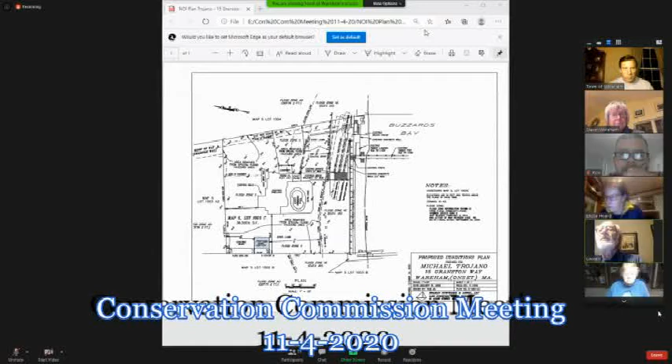Okay, so this project site is at 15 Granston Way in Onset. The project involves the construction of an addition to a barn in the buffer zone to a coastal bank. A 16 by 20 foot barn addition is proposed, approximately 71 feet from the top of the coastal bank. The location of the proposed addition is flat existing lawn area. There's no grade changes proposed as part of the project.

The barn addition would have a concrete foundation. Erosion control should be installed between the work and the resource area. Something like a silt fence should be installed to protect that construction area. We did get a DEP file number for the project. So I would recommend the project be approved with the standard order of conditions.

Yes. Is there anybody here to speak for this particular project? Like to add anything that Mr. Pichette didn't cover? I know the homeowners are here. Bill Lockwood's here too. Oh, okay. Yeah, Bill, anything you would like to add? You must be on mute. We can't hear you. I see the mouth moving. Said he thought Dave covered it very well. You just need to speak closer to your mic, I think.

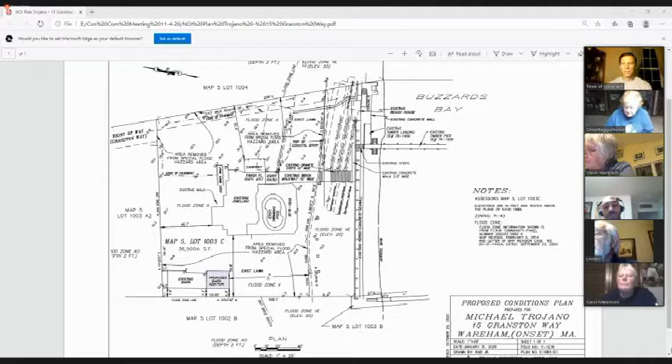Hearing none. Do you have any questions? No, thank you. Is there anybody online that would like to speak for or against this project? Seeing and hearing none. Motion to close the hearing. Thank you, I have a motion to close the hearing. Second. I have a second by Ron. All in favor, I'll do a roll call.

Jim, yes. Ron, yes. Carol, yes. Alyssa. Mary? Yes. Sandy, yes, the hearing is closed. Accept the notice of intent with the usual and customary regulations, as well as the silt fencing during the project. Okay, so we have a motion for standard order of conditions plus silt fence.

Second. I have a second by Jim. All in favor? Jim, yes. Ron, yes. Carol, yes. Alyssa, yes. Mary? Yes. Sandy? Yes, it is approved. And please, Mr. Lockwood, before you start any work, see Mr. Pichette for the paperwork. Thank you.

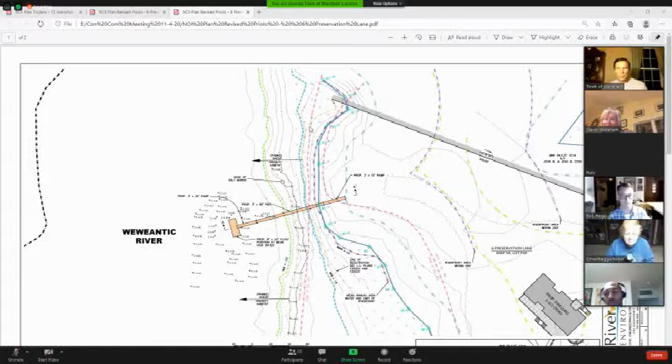Madam Chair, Bob Rigo with Riverhawk Environmental. I'm here for the hearing. Thank you. Mr. Pichette, I know we've got a couple changes that have come through, so it's your turn to discuss the project. Okay. I can hear you.

Okay, so this project site is at 6 Preservation Lane, and the project involves the construction of a pier, ramp and float in Weweantic River, which is within land under the ocean, salt marsh, riverfront area, and within a coastal flood zone. Initially, the proposed structure was approximately 170 feet in length, but only approximately 85 feet of that was from the mean high water out into the water. So they have reduced the length of the landward chunk of the pier, so there's not as much walkway over the land at this point.

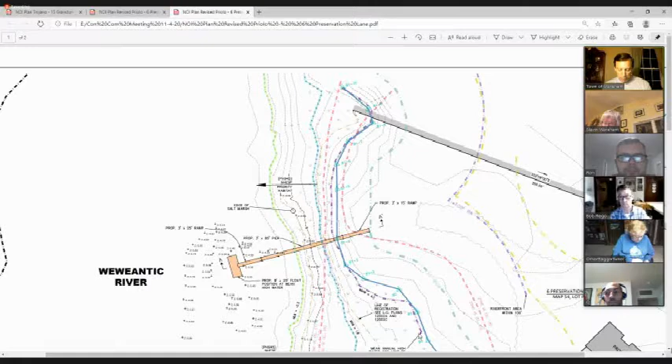At the last meeting, we were also waiting for some comments on the project from Mass Division of Marine Fisheries and also from Mass Natural Heritage. We have received comments from both of those entities. Mass Division of Marine Fisheries has made some comments relative to the height of the pier over the marsh and stated that they felt that the proposed pier should be higher based on the width of the pier.

We have since received a revised plan from the engineer where they reduced the width from 4 feet to 3 feet wide, therefore making it such that the deck does not have to be quite as high anymore because of the reduced width and the 1.5 to 1 ratio.

We did receive comments from Mass Natural Heritage, and they had no adverse comments about the project. One of the other plan revisions that came about as a result of some discussion was the size of the pilings for the pier. Initially, they were proposed to be 6 by 6 inch pilings, which is a little small compared to what we normally see. We typically see 12-inch diameter pilings for these coastal piers. They did upgrade that to make these 8 by 8 inch pilings. So I'm going to have the engineer speak to that a bit in a moment.

And then my only other question was in terms of the installation of the pilings on the marsh area. I had questioned how that was going to be accomplished. And the engineer explained they're going to use sort of an A-frame tripod that would be mounted on the marsh, and then that would be used to pound the pilings in. So I am a little curious about that. I've seen that sort of thing before, but typically for much smaller piles to be used for other purposes than for a pier. So maybe that can also be explained as well. So those are my comments at this point, and those are the plan revisions that we have in front of us tonight. And so I'll leave it up to the engineer to discuss further the changes.

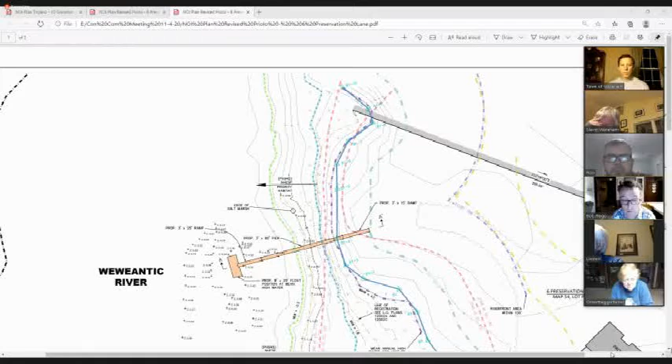The ramp and float will be removed seasonally. So those are just held in place with a structural ramp from the pier to the float, and each season those will be removed from the water. In terms of installation, the pilings inside of the river will be installed from a barge. The pilings over the marsh area will be installed, as David said, by hand. A large tripod gets set up, and there's a hammer that's placed high up on the tripod, and it hammers the pilings into the ground to refusal through the marsh.

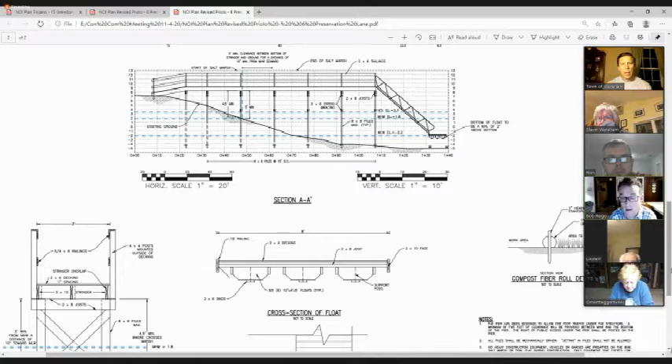And that, again, for both the 6 by 6 and 8 by 8 pilings, that's the method they use. Keith Waylow's company is Harbor Moorings, actually. His company just came to me. That is the method he uses to drive those size of piles. That's about it. So in terms of that tripod, again, I'm curious about how that actually sits on the marsh and how that may or may not disrupt the marsh just by the fact of it being operated on the marsh. That I guess is a concern I have.

It's very low impact. The tripod is composed of probably 6-inch diameter pipes, maybe, that are probably 40 feet tall each, and they each have a foot that's welded to them to kind of spread out the pressure on the marsh. So it pushes down on the grass a little bit, but it's only holding the weight of the actual tripod structure and the piling up in the air. So it's not a significant amount of ground pressure when divided by 3.

And once it's removed from the marsh, the grass just kind of comes back. It does get flattened out a little bit, just like any method or walking over the marsh, but it does spring right back.

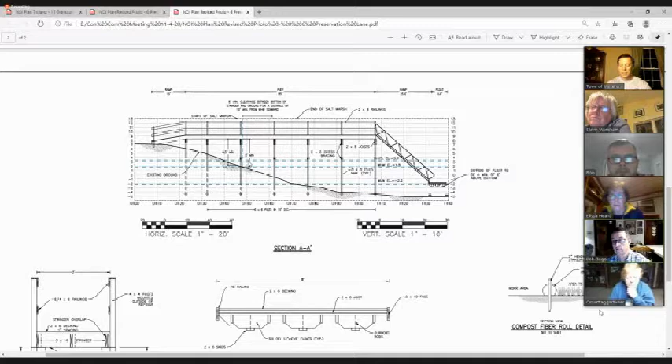As far as the height thing in terms of providing stairs, I think you might want to check on that, because I think you need 5 feet between mean high and low, not beyond mean low water. Yeah, and I misspoke. It's seaward of mean high, and we do have that. We have 5 feet seaward of mean high. Our profile shows mean high water and then the mean high tide line. So you can see mean high water is elevation 1.8, and the bottom of our dock is greater than 5 feet above that. Yeah, exactly. Okay.

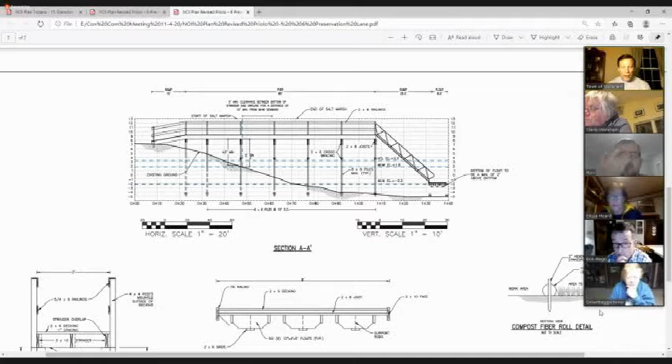Mary, any questions? I wonder if the work of this tripod will be affected by the tide?

They just do the installation at low tide when there's no water there. All right, thank you. Any questions? Just the erosion factor.

With these types of materials and everything that you're going to be using, is that going to come into play later on when there is some kind of erosion? These things have probably been done before, but with that tripod action, I guess that's something that's going to come into play with the erosion factor.

Yeah, the tripod just gets put on the marsh. Like I said, it does squish down the grass a little bit, but the grass still remains and springs back with some time. It's a muddy, peaty substrate anyway that the marsh grass is growing in, so it's not going to erode more than it does now.

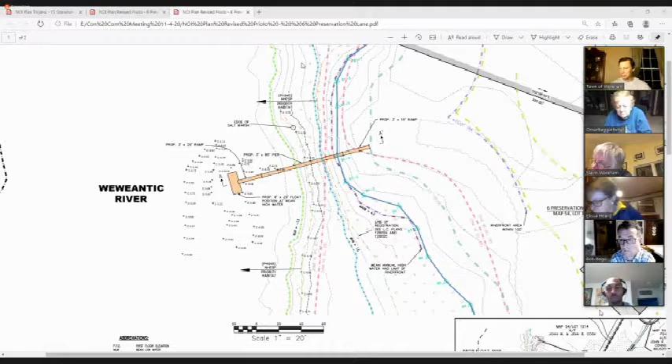No, the barge has to be done at high tide. Right, so the marsh work. Okay, the marsh work is done at low tide and the water work done at higher tides, yep. So the barge is done at higher tides and the marsh work is done at low tide, lowish tide. Okay. That's 5 plus our standard conditions. Okay. Anything else, Dave, before we close the hearing? Nope, nothing else.

Okay, move that we close the hearing. Second. I have a motion. I have a second. All in favor, Jim, yes. Ron, yes. Carol, yes. Alyssa, yes. Mary, yes. Sandy, yes. The hearing is closed.

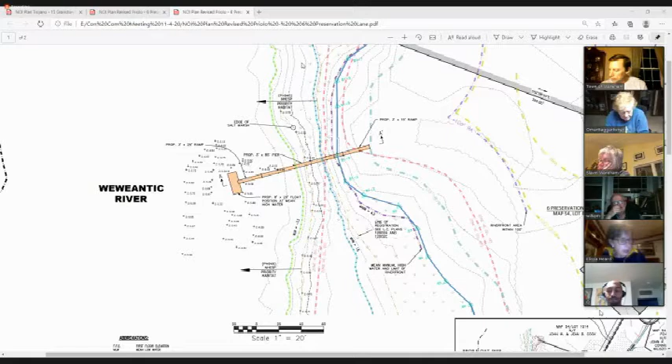That we accept the project for Glen Priolo. And with that goes that Dave Pichette will be apprised of when they're beginning, and they will not start until he is at the site. That the ramp and float are not stored in any resource areas for the winter. That the dock has a 3-foot width, and they will work at low tide on the marsh side, and they'll work at the higher tides with the barge. And our standard conditions as well.

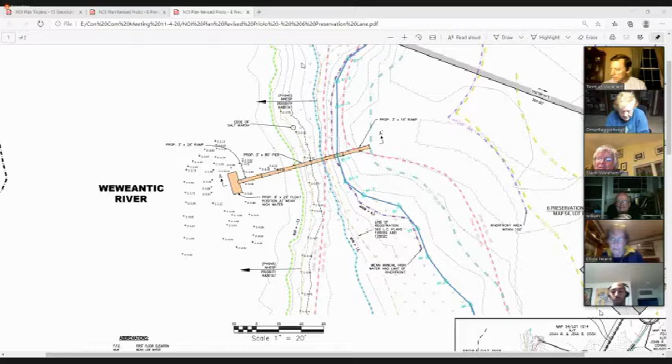I think you got it covered. Motion to accept. That's the motion. Did I hear a second? I second. Thank you. So that's it. We have our standard and our conditions, and we have a motion and a second. In favor, Jim, yes. Ron, yes. Carol, yes. Alyssa, yes. Mary, yes. Sandy.

Yes. So Bob, before you start any work, get a hold of Mr. Pichette, because you're going to want the paperwork to be completed before you start the work. And we want to see that pylon, that A-frame. Okay, sounds good. Thank you. Thank you very much. All right.

Hey, is there anybody on here for the Perego solar systems for 150 Tihonet and 140 Tihonet? They've asked for a continuation. Is there anybody online that was here for that project? Our next meeting is November 18th. I'll take a motion to continue until November 18th. So move. Second. I have a motion and I have a second.

All in favor, we're handling the two of them at the same time, 140 and 150. Jim, yes. Ron, yes. Carol, yes. Alyssa, yes. Mary, yes. Sandy, yes. We're continued until the 18th of November for these two projects.

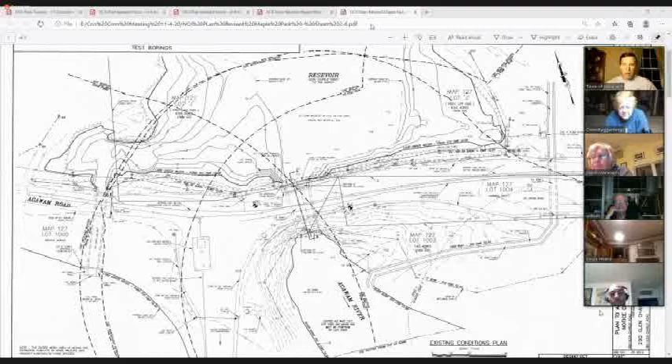I see Brian Grady's on there. In the meantime, we got from the Marine Fisheries on this. We have the Marine Fisheries, right? Did we get anything else? Yes, we did get a letter from the Division of Marine Fisheries. They did have some comments. They suggest a time of year restriction for the project. Yep. So I think I sent that letter around. Yes, you did. All right.

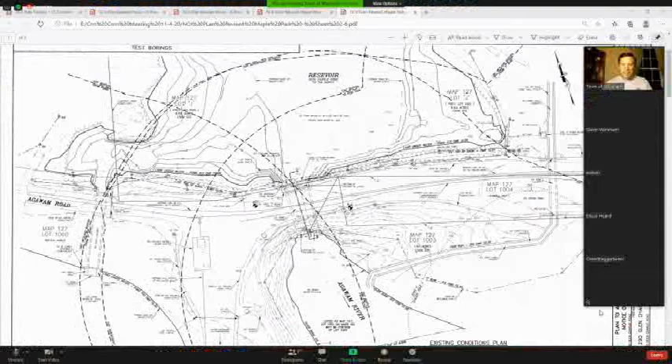So you're saying Bill's online? I see him on here, but he's not active to discuss or comment for whatever reason at this moment. I see Brian Grady's on here also. So I'll go through and make some comments and then we'll see if they jump in. Excuse me, Dave, this is Jamie Medea. I just texted Bill Madden. You all moved so quickly that I think he didn't realize that you are ready for this matter. I just texted him to unmute. Okay, sounds good. Thank you, sir. Thank you.

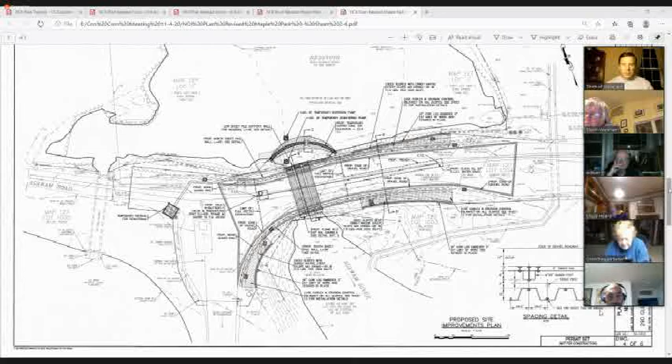Well, your report is virtually what you did last meeting, right? So you want to start? Sure. I'm going to just bring up a different view real quick. One of many views. Okay, so this project site is at 290 Glen Charlie Road.

Excuse me, Dave, I'm sorry. I've just heard from Bill Madden. He's having trouble with his computer at the office. So I'm going to take notes of your presentation, and he will text me if it's indeed hopeless for him technologically. Otherwise, we'll ask you to just keep right on going, and I'll let you know how it's going. Okay, yeah, and if he needs to sign in from a different computer, when he signs in, I'll see that he's trying to get on, and I'll let him in if that's an option too. Absolutely. Thank you so much. All right.

So again, the site is at 290 Glen Charlie Road, and this is the Maple Park Campground site, and the project involves the reconstruction of a flume/culvert under the access road to the Maple Park Campground, and this is within riverfront area of the Agawam River, within inland banks, within an anadromous fish run, and also within the estimated habitat of rare and endangered species.

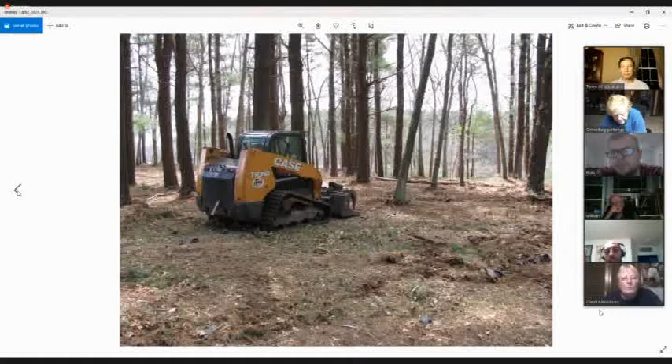Jim, any questions? No, I don't. Ron? No. Carol? No. Alyssa? So David, looking at this, I mean, I know that getting things surveyed is very expensive, and it's something like this. I did not go to this site, so I don't know what it's actually like. Is there any way that the owner can mark off distances, or does this have to be done with a surveyor?

I mean, the suggestion is to do it that way. What I would like to do maybe before that happens, if the commission wants to do this as well, I have not been back there since the initial violation with COVID, with everything else going on. I was under the impression that JC Engineering was in the process of doing a plan, so I wasn't rushing back down there to see what the status of things was.

But at this point, I would actually like to revisit the site with the owner, and I would encourage members of the commission to do the same. Maybe we could set up a time so that everybody can see this, or anybody on the commission that wants to see it can see it. Because I think this is the sort of thing that you need to see in person and get a sense of what's what there. And if things are growing back, as Mr.

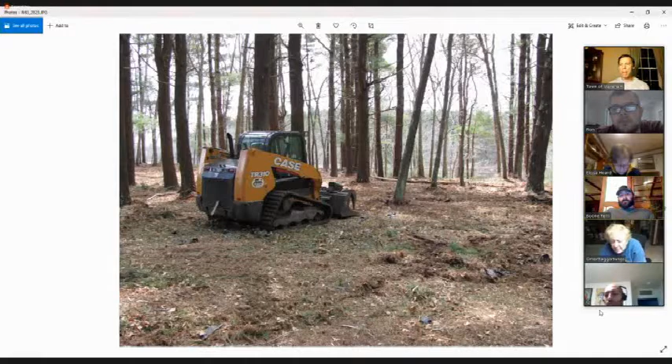Ferry suggests, then we can see that at the same time. So I have pictures of everything that David has pictures of, and it's all growing back. If anything, I did a service to the environment by taking out the dead stuff and allowing fresh vegetation. I mean, the whole ground is covered in fresh vegetation, I don't know, a foot tall.

It's not a severe slope. It's a very gradual slope. There's no erosion, there's no nothing. There's a thick 12-inch forest mat covering the whole property, and it's growing back fine. I mean, I have no problem providing documentation of it.

I know, but I think you have to accept the fact that David is looking for another answer for you by going down and seeing your area. Because as you said, with COVID and all, we haven't seen it. So I think that by looking at it, then we have more of an idea of what we're dealing with. And I think that that's probably a really helpful thing for you.

Right, I understand, and I'm not totally averse to having strangers come to my house. But we are in the middle of a pandemic, and I have a daughter, and I have elderly people that come and go from my house. We could maybe set something up if that's what you guys want.

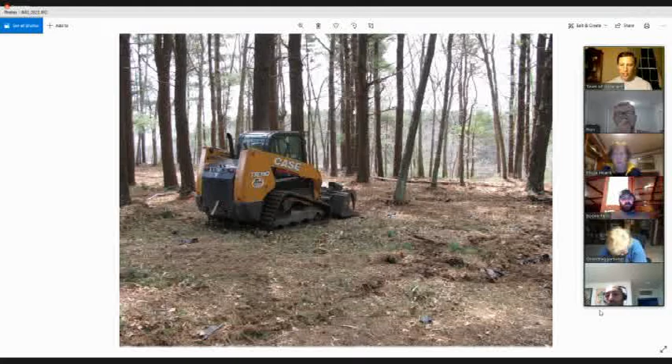Yeah, so I think in terms of reviewing this, we certainly don't need to go to the house by any means. We're just going to be looking at this particular altered area. And obviously, any site visit, people should wear masks and social distance, and it's going to be outside, so I think we should be fine.

Again, if it's something that you are saying you don't want to participate in, then I would have to say again, we need to have an engineered site plan. I mean, you got to have one or the other.

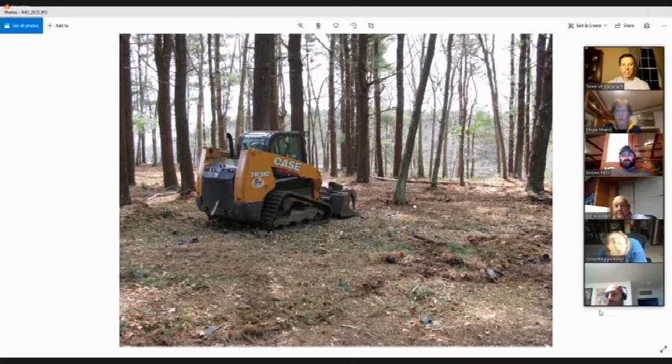I'm listening to them. Somebody's speaking, because I can't hear them. Yeah, it's okay. Well, let me continue to ask if there's any questions from Mary. No question at this time.

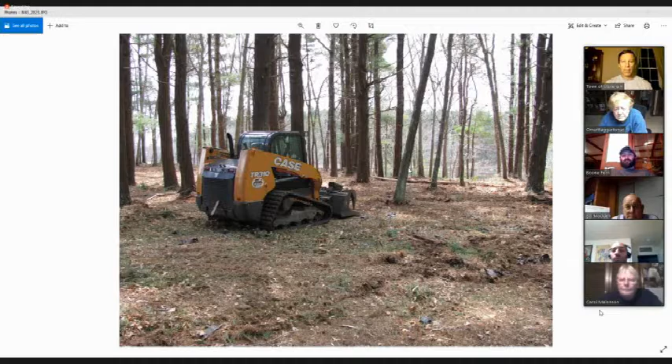I definitely like the idea of a site visit. I don't want us to really go down one at a time type thingy. So we could maybe caravan with Dave, each in our own car, to go down and look at the site and go nowhere near the people that live there. Safe distance with mask, because I'm sure all of us would like to see where this area had been mowed and what it looks like now. And so, once again, pictures or video wouldn't do justice to the site.

Well, you said you have pictures, but I don't see them. Is there a way to upload pictures? I can email the pictures right now, if there's an email address, like David's email or something. I still think it would be something that you need to see in person. Pictures are fine, but they don't always give you the full view of the situation.

So, I do recommend the commission either meet there. I definitely want to see what things look like currently. And if not that, then again, we should be requiring to have a site plan submitted. I agree with David. I think a visit just to take a look. Pictures can only say so much. I think a visit just to see all of the conditions makes sense.

Well, does the committee want to go down by themselves one at a time or wait and caravan with Dave? Set up a time. Yeah, set up a time and whoever can be there, be there. That way we can kind of use our collective heads to talk about it while we're there too. This isn't an easy site to find. Right? It's off of Mather? No, it's not off of Mather, but if we meet, let's say at the town hall, then we can just go down there and I can lead to where it is.

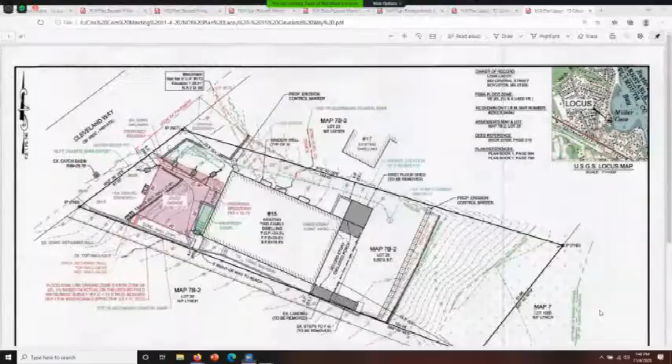My shoes. Hello? Yes. Okay, let's see here. You gonna lose your shoes? Oh my gosh. No, thank you. Hello? Yeah, we can hear you, Bill. Okay. Hold on one second, okay? Sure.

So this project site is at 15 Cleveland Way, in the Indian Mound Beach area. The project involves the construction of a garage in the buffer zone to a coastal bank. A 20 by 20 foot garage is proposed, within the 30-foot no activity zone to the coastal bank. The lot is very small and slopes steeply down towards the beach. The proposed garage would be between the street and the house, but is within the 30-foot no activity zone to the coastal bank.

At the last meeting, we did not have a DEP file number. We do now have a DEP file number, but it's my opinion that the project should be denied because it is a proposed garage within the 30-foot no activity zone. That's my recommendation, and I'll let Bill speak on it. Well, we'd like to withdraw without prejudice at this point or continue to a further date so we can have some discussions with Dave in the interim, if that's a possibility.

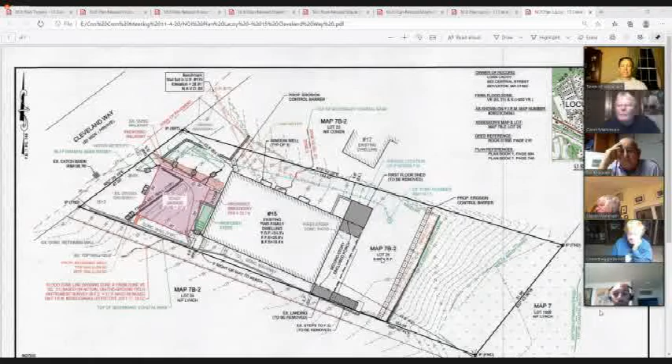Then I'll take a motion to accept the withdrawal. Motion to accept the withdrawal. Second. I have a motion and a second. All in favor, Jim, yes. Ron, yes. Carol, yes. Alyssa, Mary, yes. Sandy, accepted withdrawal. Thank you. Okay, thank you all.

Now, I see Mr. Madden on the line. Take a motion to untable 290 Glen Charlie Road. Motion to untable 290 Glen Charlie. Second. I have a motion and a second. All in favor, Jim, yes. Ron, yes. Carol, yes. Alyssa, Mary, yes, and Sandy. You're untabled. So Mr. Pichette? Yeah, I'm just gonna get the plan back up here, then we can have Bill talk to it.

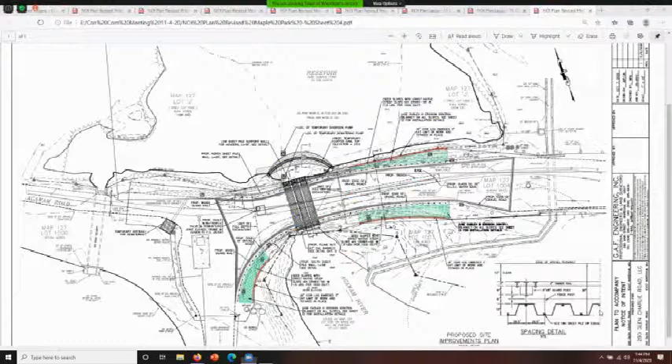Now, with the Division of Marine Fisheries, they gave us a defined work restriction for timetable. Yes, the work is recommended from March 15th to June 30th or September 1 to November 15th. So we're right there at the end of the recommended time frame. So, okay, if you could, go. Do you want me to interject a thought on that, Dave, or do you want to comment on it, Bill? No, Dave already spoke to this particular project. Now we would like to have any comments you have on it.

Okay, with respect to the Division of Marine Fisheries letter, that time of year restriction is limited to in-water activities. And that's what we're actually trying to avoid, really in-water activities on the site. We think that the steps we need to take initially with the construction of the project would be the demolition and the placement of those steel sheets. So I don't think we're going to really be in the water conducting much of the work here. There really shouldn't be any in-water work to speak of.

I mean, that's a pretty broad statement to make. There may be some minor things that a workman needs to do down by the water's edge initially, but the only work in water is really burning the holes through the exterior face of those sheet piles when the flume gets installed. So really, it's not work that's in the water, but it is an activity that may require somebody to be in the water or nearby that water. So we don't think that time of year restriction would adversely impact what we want to do, and we can work within that parameter. Thank you for the clarification.

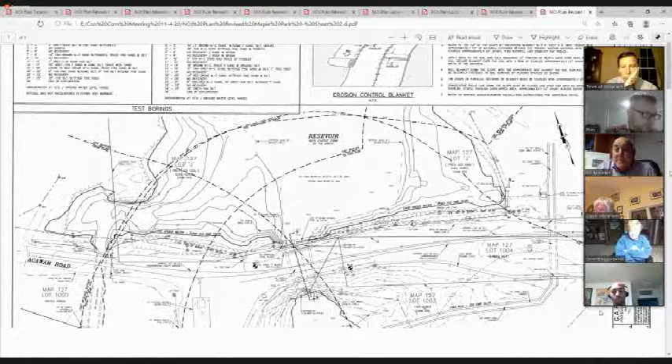We show our detail. We show that we're going to place that coir log right at the toe of our slope where we're going to basically entrench that, and then slope with topsoil up the slope to the edge of the stone that we're placing by the guardrail and the fence. You asked us to look into some more naturalized conservation seed mix to use in that slope stabilization. We selected what we think is a really suitable slope stabilization mix to be used there.

We've selected the Curlex 3 erosion control blankets to be placed over that. Those are good for slopes that are in excess of 1-to-1. Our steepest portion of slope would be a very small portion of 1-to-1, and then it would taper to, say, a 2-to-1 as we head to the east on the right-hand side, on the east side of the flumes. So we think that in and of itself provides a far better stable situation than the existing vegetation would allow for us.

The vegetation from below that area, yes, we'll keep all that. We don't have a problem with it, but I think the top piece should be stabilized in a manner that will have some longevity associated with it. And we worked to look into and comply and select something that we thought you would be in agreement with. So that's why we're doing it in the manner that we're doing it.

Yeah, so this plan that I just brought up indicates the amount and distance of vegetation to be removed in the different sections, such as right here, over here, and overall on this side as well. And again, I understand the nature of what has to be done there. I think some of this is basically an effort to make a nicer entrance to the park is what it boils down to. Yes, it is to do with fixing the problem, but I think there's sort of a twofold request in what's being put forth here.

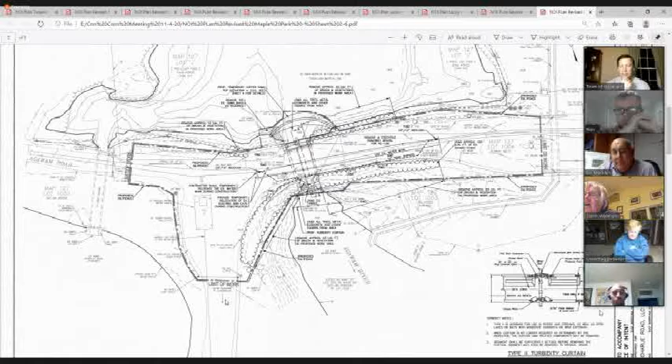I couldn't get down because I didn't think I could get back up. Well, I felt the same way. I crawled up and it wasn't very pretty, but I got it done. But it's a mess over there, Mike.

Bill, if this vegetation would be removed, you would replace it with some type of holding cloth and then seeding it with grass to prevent... Not grass. We're using a naturalized conservation mix that's for upland steep slopes. It's an Ernst seed blend. It's specified on the drawing. That seed bed would be covered with a Curlex 3 erosion control blanket stapled in place that will ensure longevity of that seed bed and the growth of the plant material through it.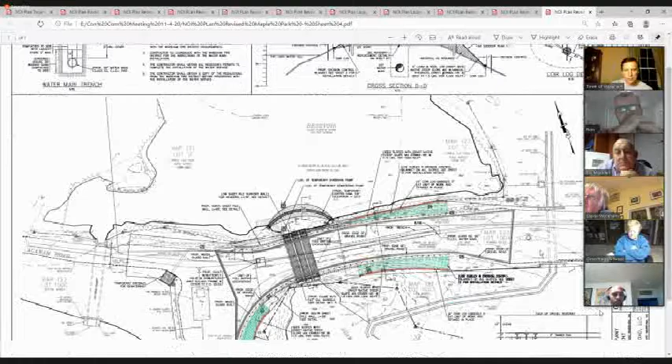So if I'm hearing you, it would be better for the stabilization of that slope if we were to go that way versus letting the natural stuff stay. I think so, given what's going to be taking place out there with the construction. Because I don't consider it to be substantial vegetation. It's not what you call good stuff. It's just a lot of miscellaneous things that have grown up. That's kind of how I viewed it. Well, that's what is natural vegetation. So again, I'm not disputing that some of it needs to go. If the commission's comfortable with it, that's fine. I'm just looking to have the least amount of alteration and still accomplish the project.

If I may say one word, this is Jamie Medea. May I speak for a second? Yes, please. Only to say that I get called in when the owner is desperately needing a project done, which they know they have to do because of erosion or maintenance problems. And I can just tell you, I have heard not one word about aesthetics of improving the entrance. Zero, not once. The entire thing has been about, oh God, we've got to do this. It's too much of a risk for the water main. It's got to get done. Just get it done quickly. Not one word about aesthetics, and absolutely whatever you think is appropriate for the vegetation.

And if I just might add, the areas where the steel sheeting is to be installed, we're not removing any of the vegetation downslope from that. All that material is going to remain in place. That is the material that's closest to the river and to the pond. So you can see the only area that we're looking to stabilize is the area that's shaded in green. All those other areas will be that natural vegetation that is growing there. So that portion of it is to remain. Okay.

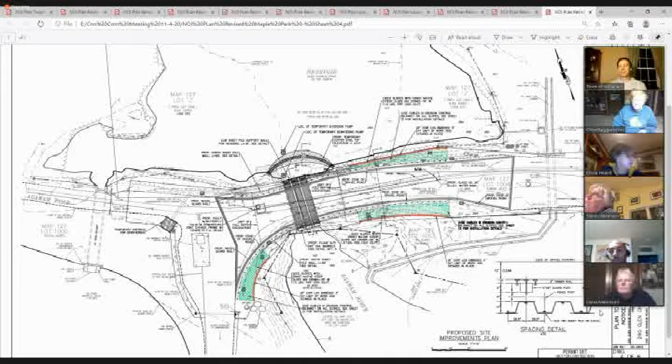If the applicant is willing to address the matter, then you may not need to do an enforcement order. Okay. I just think it's always good to have something of that nature on record. Jamie, you want to comment?

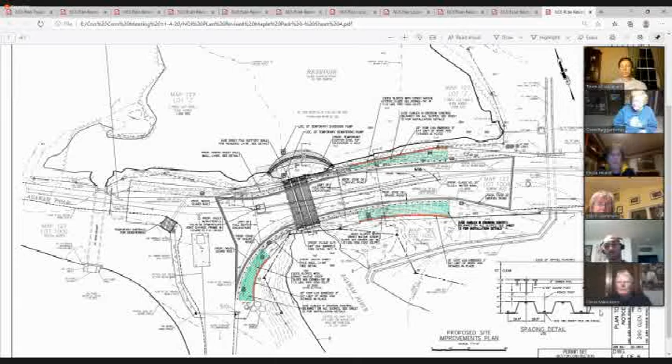Certainly, ma'am. The owner is more than happy to address the topic. There's a lot of history that was not in this owner's control, and we would want to have good factual information for you and a proposal for how to address it. A letter asking us to submit a notice of intent for whatever is intended within a certain period of time that's reasonable would be very well received. Okay.

All right. Just give us time, please, if you would, enough to get correct plans in, because Bill Madden's doing this current project. Totally understand the critical nature of what you're working on now. So Dave, a letter in a month or so, 2 months? Unless the commission wants to, I'm not going to look for an enforcement order. I would think a letter to the owners requesting a notice of intent for that fill.

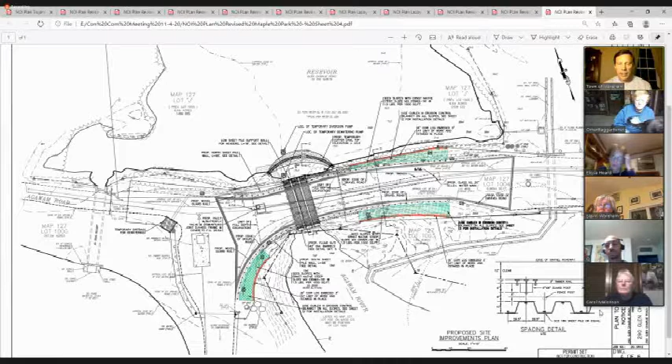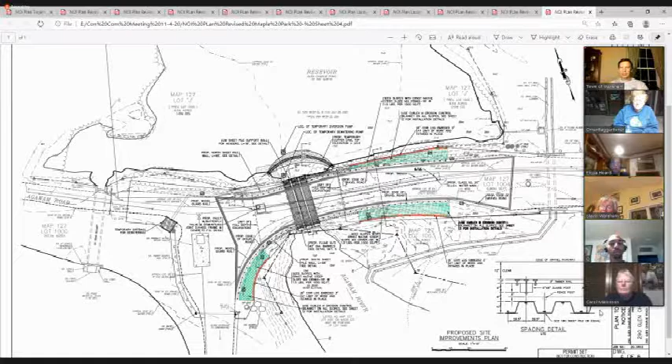Yeah, and that's fine. I would give them a couple of months, because it's gonna take a little time for a plan to be prepared, and I know Bill's busy with this and other things, so I would say that would be reasonable. Thank you. Is there anybody who objects to that plan? Okay, so that's it. We're continued until the 18th. Thank you, everybody.

Next is the enforcement orders from Scott. I can't pronounce that one. Vajgrt, I think it's pronounced. That enforcement order.

Okay. Oh, I was hoping this would be an easy night. So much for that. It's 8:30 already. Okay. Dave, it's up to you now.

This location is 34 Point Pleasant Circle, which is in the Shangri-La area. As you can see, this site is on White Island Pond. This site plan that you see is a plan that the applicant had submitted for some previous work that was done there, which was a previous violation. That was addressed through an order of conditions and complied with.

Most recently, I had been notified that some work was going on down by this beach where stone was being added all down by this water's edge, and sort of a low sheet wall was staked into the ground along the front of that stone. So I did go down there and take a look and did see that this was occurring. So I did submit an enforcement order to the owner. Nobody was there at the time when I stopped by.

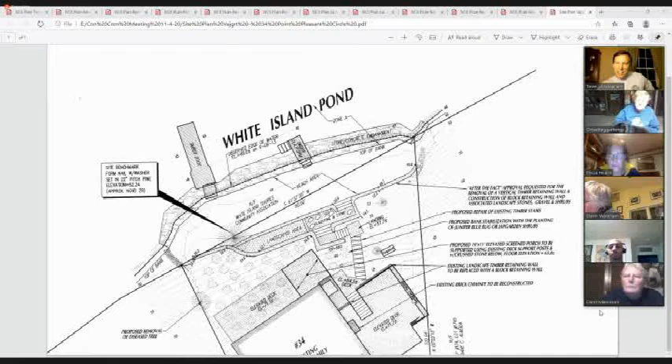I was hoping the owner would be here to discuss it, but I'm not sure that anybody's on tonight, but you can ask. Is there anybody here for this particular violation? Anybody, Dave? What I was going to say, what I can do is try to reach the owner again for the next meeting. But if not, then we may have to have this delivered by a constable.

I sent it by certified mail initially. I did not get a return receipt back yet. So I can't even say for 100% that these people got the letter that I sent them. But that's usually the way I start with it. And then if we don't get any action, then I have to take it to the next level of delivery.

Okay, do you want anything from us? I would just say to vote to ratify the enforcement order. I think that's the motion. Second, I have a second. All in favor: Jim, yes. Ron, yes. Carol, yes. Alyssa, yes. Mary, yes. Sandy, yes. So one more piece of paper we have to sign tomorrow.

All right, when do you get in tomorrow? Dave, what time do you get in tomorrow? I'll be in by 8:30. But I've got to leave a little early tomorrow for some work that I've got to do out. If I'm not there, I'll leave the paperwork with Sonia, and you'll be able to still come in and sign that. But I will be in the office probably until around about 9:15, and then I've got to bail out.